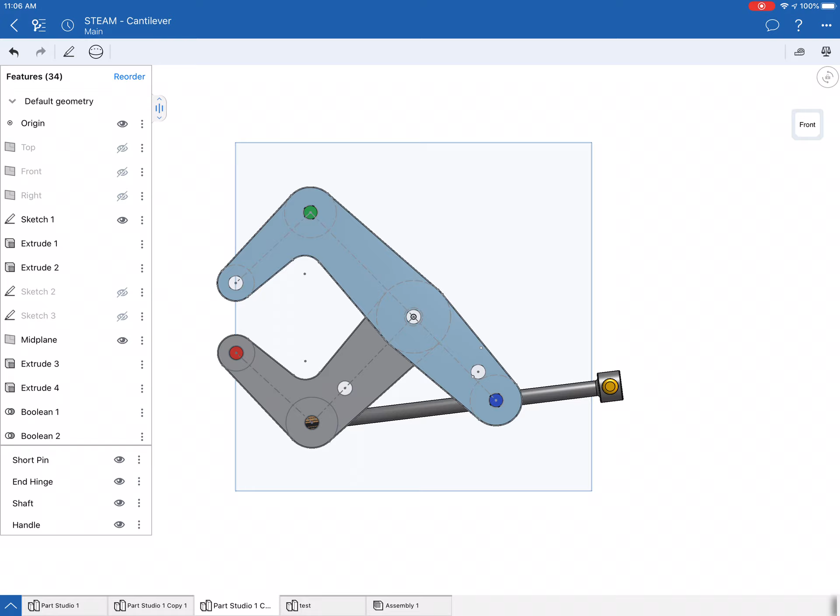Okay, we're going to finalize this drawing today for the cantilever. And as you can see, we have all the pieces already on this, but we are missing the grips. The grips are these square pieces right here, and that's what we're going to work on today.

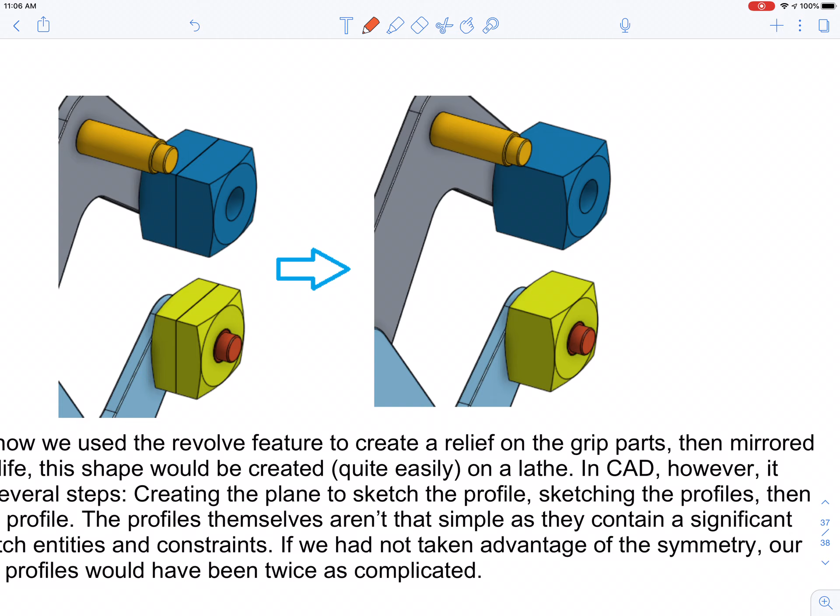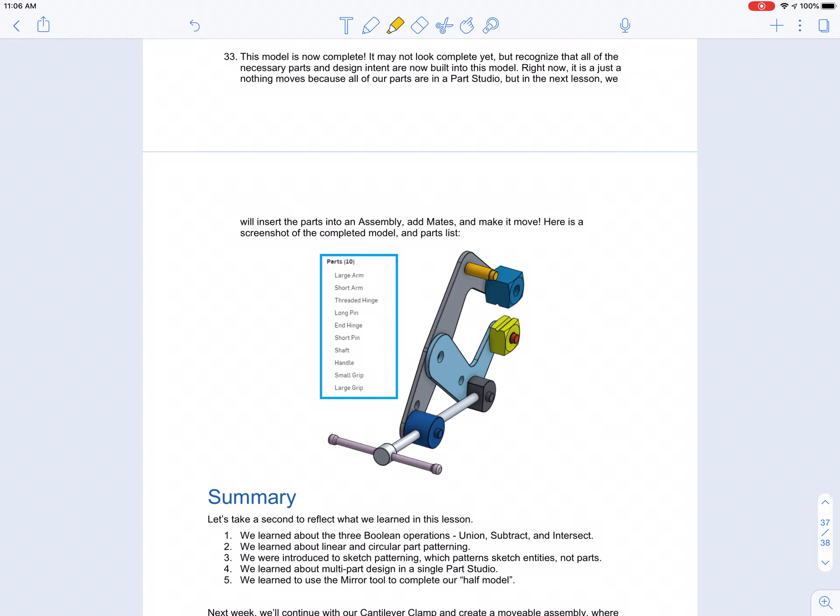So these are steps 26 through 33. Again, we're going to draw one side and then mirror it so that it becomes one whole piece, like this, okay, as we've done with the pins and the handles. And once we're done, we're ready to move on to lesson 4.

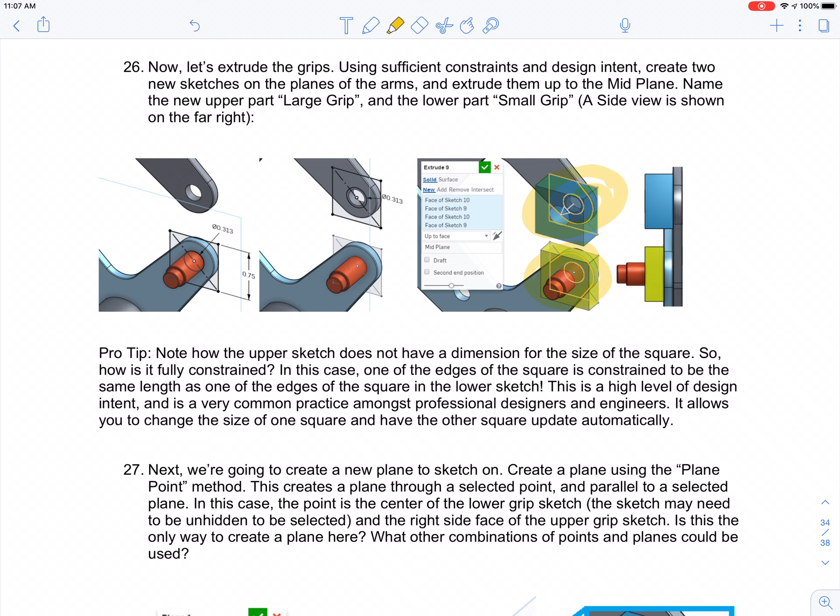Okay, so we are on step 26. Step 26 says, let's extrude the grips using sufficient constraints and the design intent to create the new sketches, planes, arms. So we have to create them on a plane that's on the face of the arms. This grip is on the face of the small arm, and this grip is on the face of the large arm. So the grip that's on the face of the large arm is your large grip, and the grip that's on the face of the small arm is the small grip. Meaning, this is small, and this one over here is large.

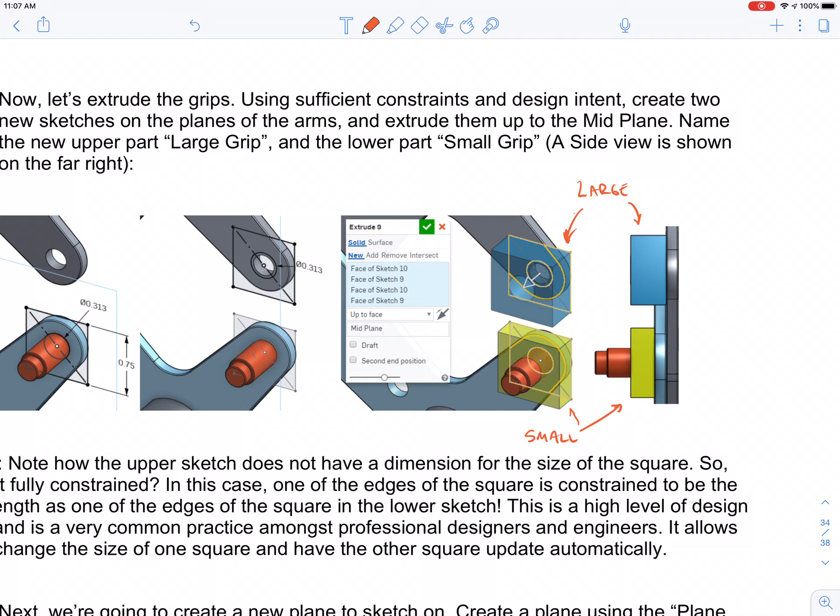All right, and our dimensions are going to be, they're going to be 2 squares, so our dimensions are going to be 0.75 for both sides of the square, and there's going to be a circle of 0.313 diameter in the middle of it. All right, let's get to it.

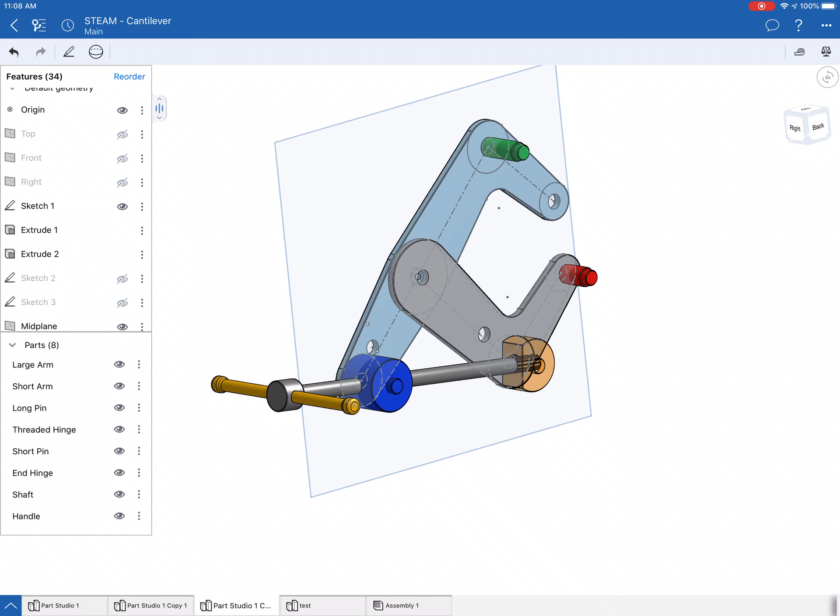All right, so I have the drawing of my cantilever here, and as you guys see, I've increased the size of my parts menu. Why? Because what I want to do is make everything that I do not need invisible.

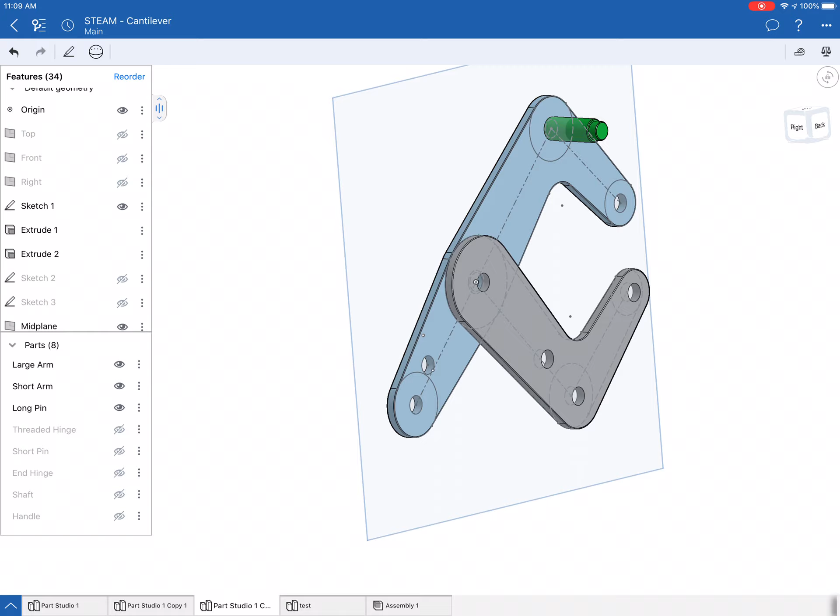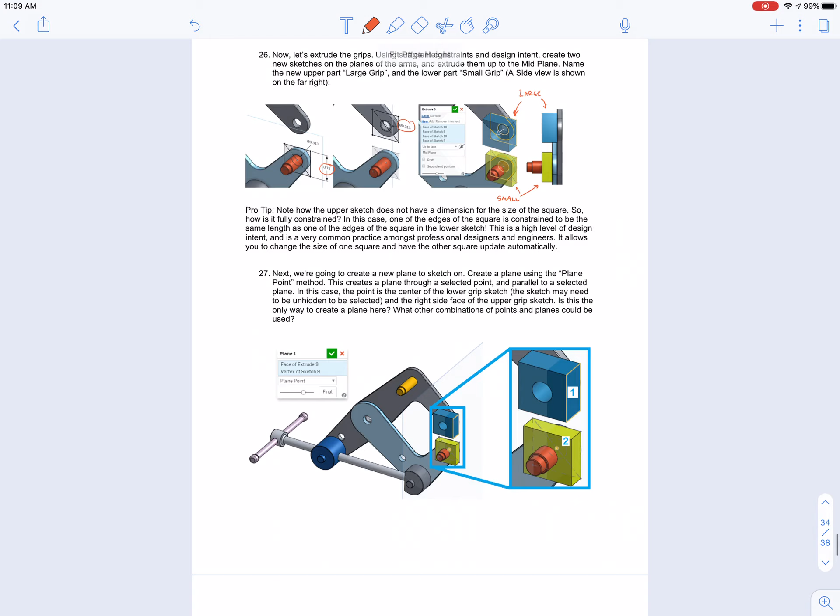So now the question is are my arms facing this way or are they facing this way? Am I seeing the front side or the back side? Well, that's easy, we can check. We're facing the back side of the arms. If you see over here, the clamp is opening to your right, so that's what we want. So I'm going to click on back.

I'm going to lock the screen, and now I'm going to draw my square. So I'm going to click on sketch. It's asking me to select the sketch plane, so I'm going to click the face of the small arm first, and I'm going to click align. Now this is on the plane of the front of the face that's facing you, of the back face of the small arm, which is facing you right now. That's a dark gray on your screen. Okay, so what I'm going to do is just draw a square on it, and it could be any dimension, it doesn't matter, because what's going to happen is you're going to set the constraints for it later. And as a matter of fact, you can draw this on the side over here.

Boom, I'm done. And how do you know it's closed? Because the shading of it is black inside, the shading of the inside of it is black. Okay, and finally, what I'm going to do is highlight all of them, set them to construction lines, and make another line diagonally across. And I'm done. Now I'm going to set my constraints.

I want these to be perpendicular to each other. So I highlighted them, then I'm going to click perpendicular. Boom. And again, I'm going to say this and this are going to be perpendicular to each other.

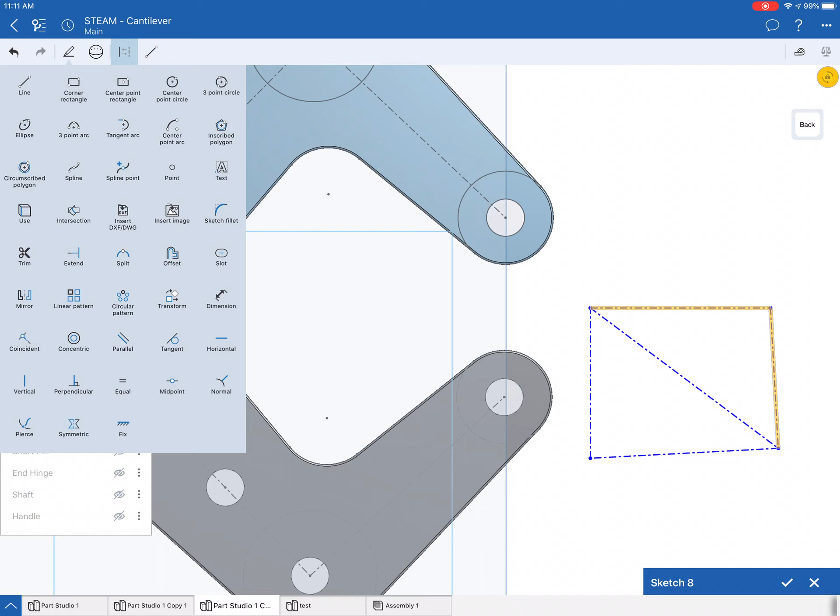Okay, I'm going to set 2 more lines perpendicular to each other. Once I set these 2 perpendicular to each other, that's all I need. Now they're all perpendicular to each other. Now all that I would need is to set my sizes.

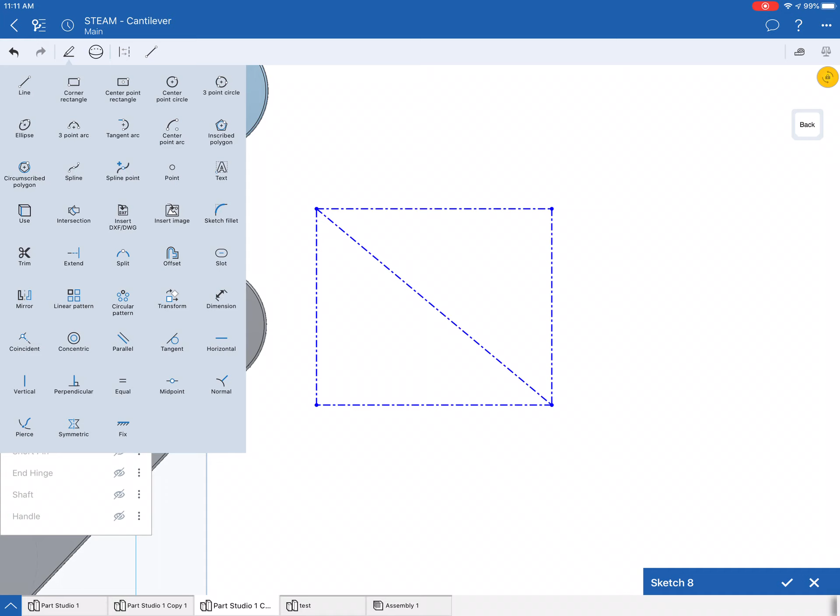I know that this is going to be 0.75. So I'm going to go into my dimensions, click on dimensions, click the side, and set that to 0.75. Done. Now for the rest of them, easy.

Oh no, I forgot to unclick. You're supposed to unclick the dimension settings. So I'm going to click that one and this one. The one on the right, the vertical line, is set to 0.75. I'm going to click on my menu, click equal. Boom, they're both set to equal.

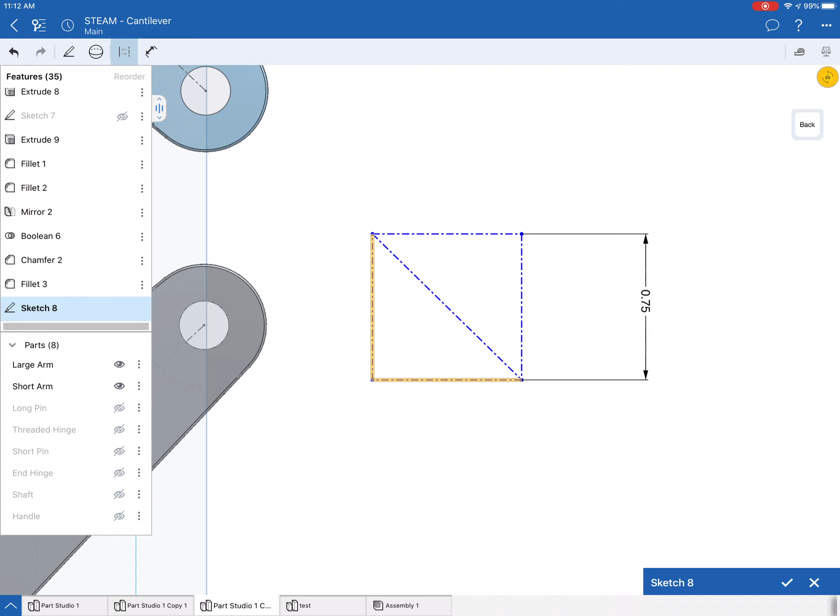Now, because these 2 lines that I'm highlighting are also perpendicular to those 2, and they're perpendicular to each other, I would not have to set their length equal to the other 2, because by definition they will be equal to 0.75 since they're perpendicular to each other and both perpendicular to 2 lines of that length. So that would just be over constraining them. I don't want to do that, I don't need to do that. I can do it if I want to, but it's not going to affect my drawing unless I ask it to do something it can't do, acting against something I've already asked it to do.

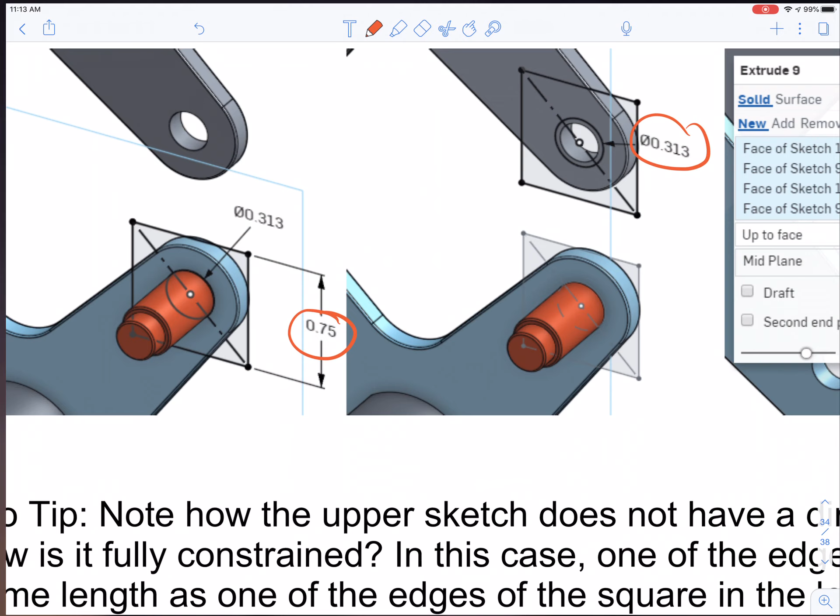Next thing I'm going to do is draw my circle. Center point circle. Now I'm going to click anywhere near the center, and it should click to the center of the circle. Now I don't think that's a construction line. Actually, the outside lines of the square are not construction lines, only the center line.

So I'm going to change all those lines again. I'm going to click that, unclick the circle, and click construction lines. So I'm going to click on the circle and all the lines that I want to change back to regular lines. Boom, and there we go.

Now what I want to do is set the size of my circle. So I'm going to click dimensions, click that, and that is going to be 0.313. Boom, I'm set.

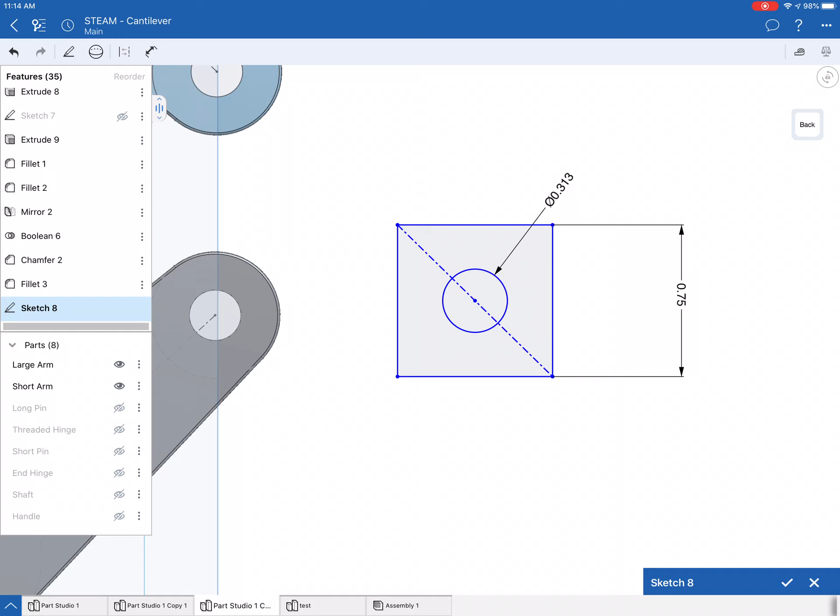Now, because the circle is constrained to the center of that diagonal line, if I move that circle, the whole box is going to move. What does that mean? I'm going to click this circle and this circle right here, then open my sketch menu and set concentric. Boom, immediately everything moves to that spot.

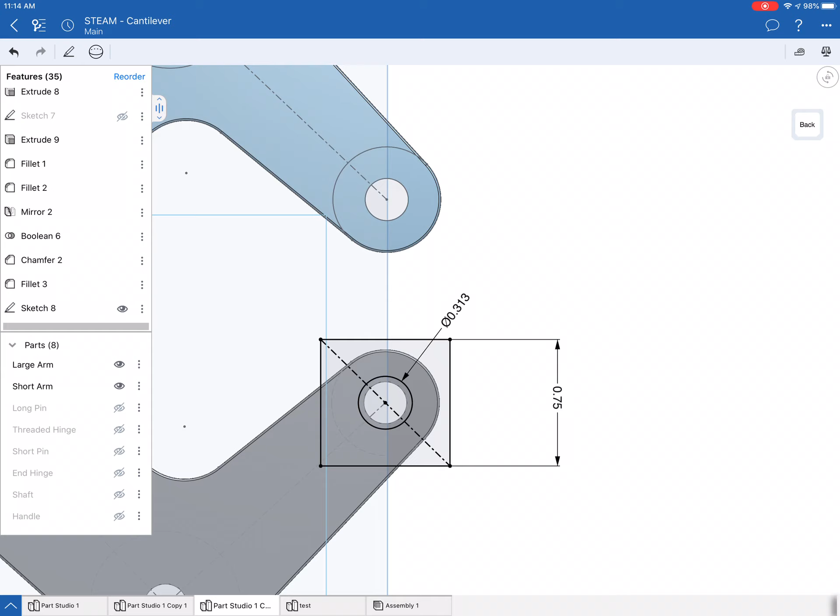Again, I'm going to do the same exact thing for my other line. Okay, I'm done with that sketch. Boom, done. Now I'm going to go over here and click on the sketch menu again.

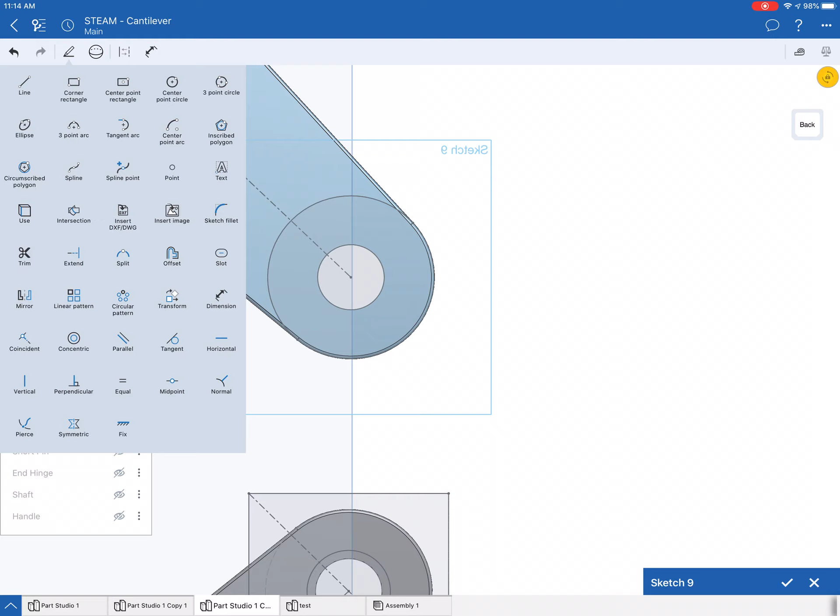This time I'm going to click on the face of the large arm, which is that light gray, blue-green-gray that I have there. All right, that's my sketch. I want to lock my screen so you don't shift it, and I'm going to click line.

Again, I'm going to draw a square. Boom, square done. All right, now I'm going to set my lines perpendicular. Oh, and I want to draw a diagonal line here. Boom, okay, now I'm done. All right, now I want to set these 2 perpendicular to each other.

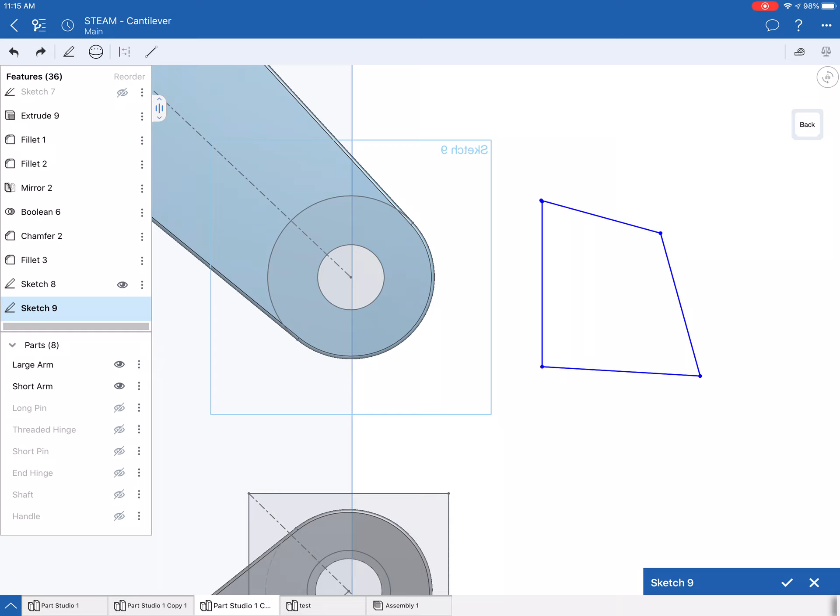I'm going to click here, perpendicular, and okay, that's weird, let's see what went wrong. Oh yeah, those lines are not joined together. I'm going to do that line again. Click here, click here. Okay, now they're joined.

Good, all right, so now I'm going to make my diagonal line. Okay, now we're going to set my lines perpendicular to each other. Highlight that line, highlight that line. Sketch menu, perpendicular, boom.

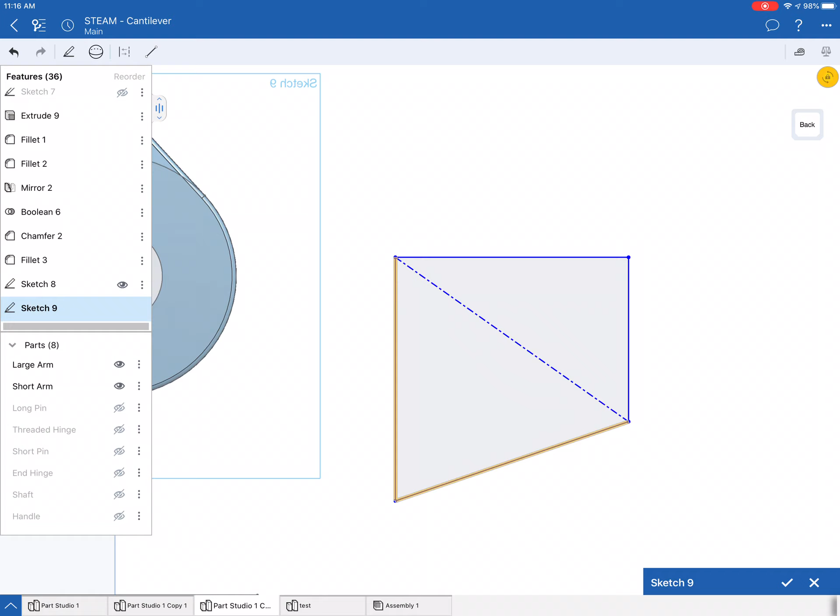Okay, now I'm going to set this line and this line perpendicular to each other. Perpendicular, boom. And now I'm going to set this line and this line. Now, I don't have to set this line and this line perpendicular to each other because they're going to be perpendicular just because that's the way quadrilaterals work. If you've taken geometry, you should be aware of why that works.

And now, if they're all perpendicular to each other, I have a quadrilateral. What I have to make sure is that, again, they're of the right dimension.

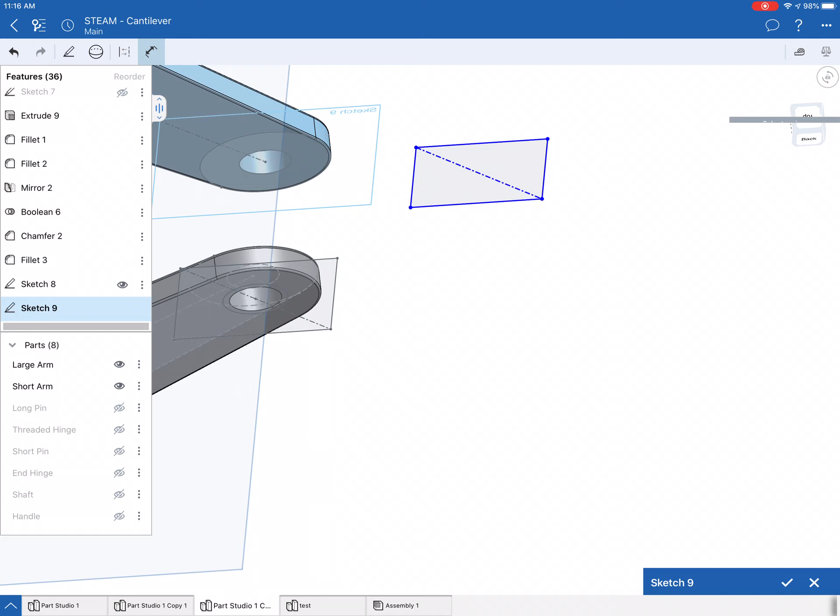So I'm going to set— actually, I don't have to set dimensions. I can just set them equal to the square that we already have there. So I'm going to highlight this line and this line, and click equal. Boom.

So now I'm going to set this one and this one equal to each other. Boom, and now we have a square. I don't have to do anything for this line because we've already set them perpendicular to those two other lines, which means that they have to be.

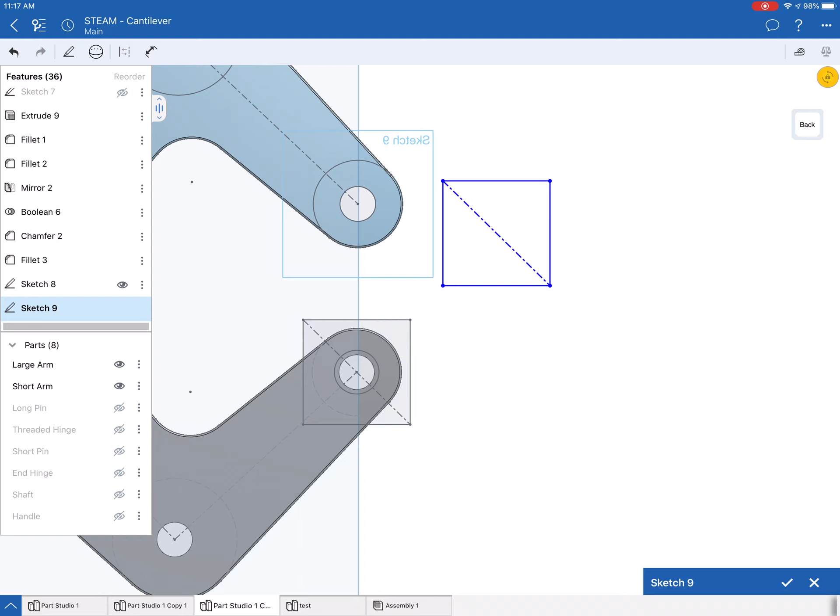Okay, so now I'm going to draw a circle. Again, all I have to do is click somewhere near the middle of the square, of that line. The midpoint of that line is going to be right at the center of the square.

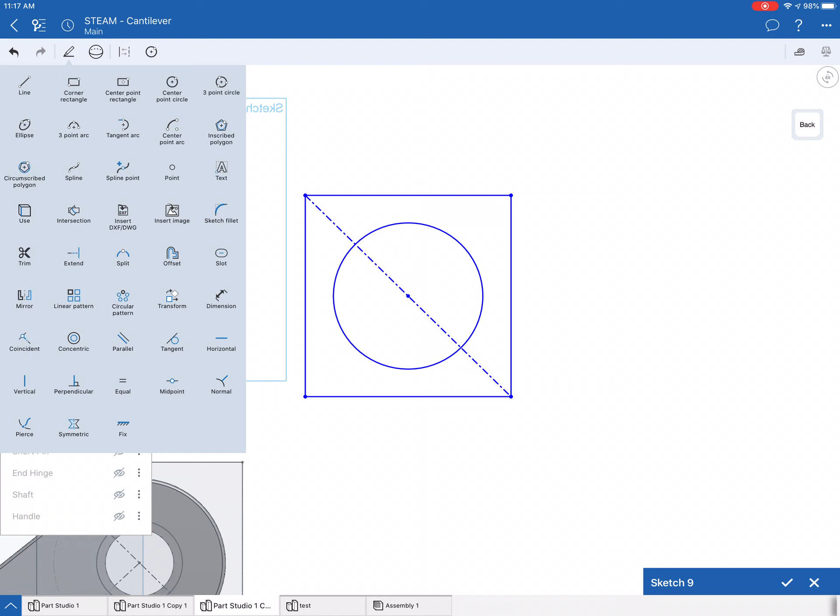So I unclick circle and click dimension. I can click dimension, or even better yet, easier, click the circle, click that circle, and set them equal to each other. Boom, done.

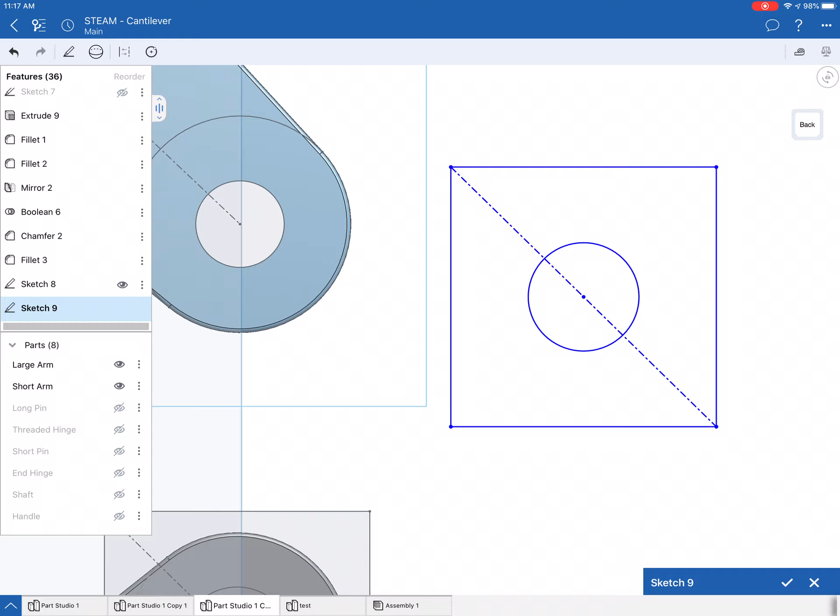Okay, now I want to make sure both circles, this new drawing is inside of the other one. Now there's something weird about this. It's not shaded gray. So I need to make sure that it is shaded gray.

Let's see, I'm going to set this line. What's happening here? Oh, I see what's happening. It's just, I'm going to click OK and edit my sketch. Okay, now it's gray, that's why I wasn't. Sometimes things like that happen. Just OK the sketch and then reopen it, re-edit it, and you'll see that things should be the way that you want them to be, especially in a simple exercise like this.

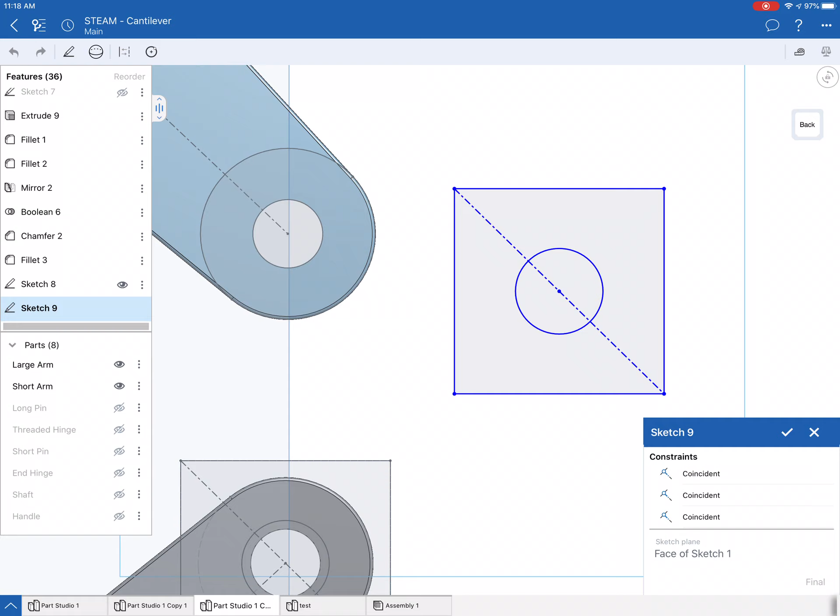Now what I'm going to do is click on my circle, the outside of the circle, and the outside of the circle here. I'm going to open my menu and click concentric, and now we have two circles right on top of each other, and the block is exactly where I want it to be. You notice that all my lines turn black because they're perfectly constrained.

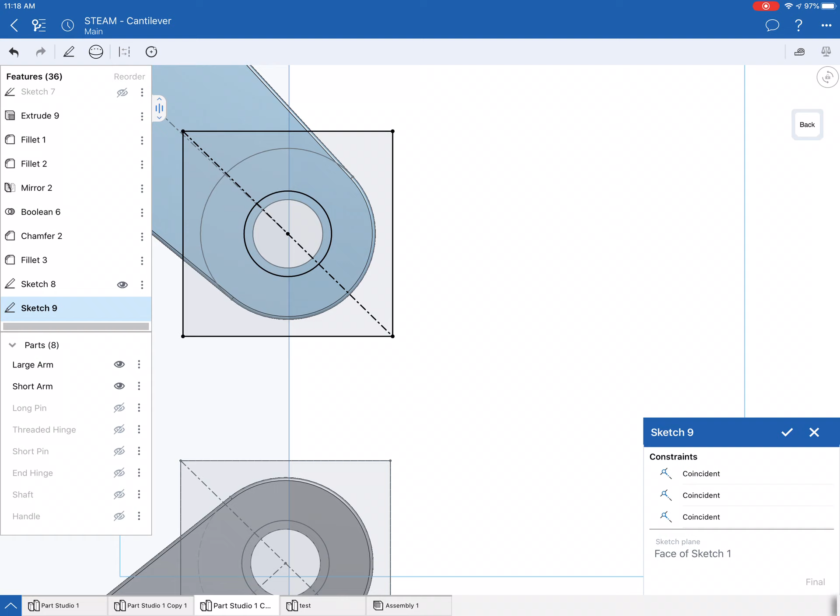Let's move on, let's see where we go next. So all of this is set. Now we're going to have to extrude the grips. We're going to have two grips, we're going to extrude them up to the midplane, and we have to change their names from large grip to small grip.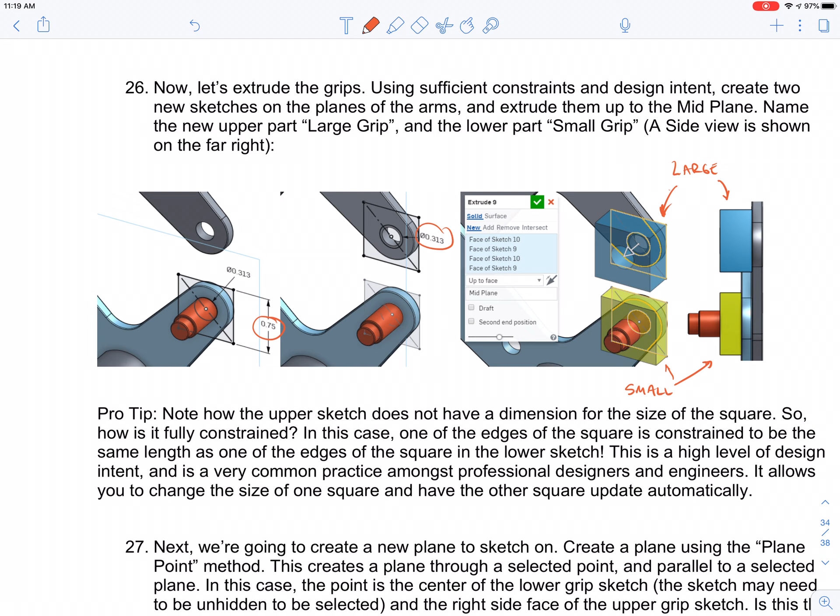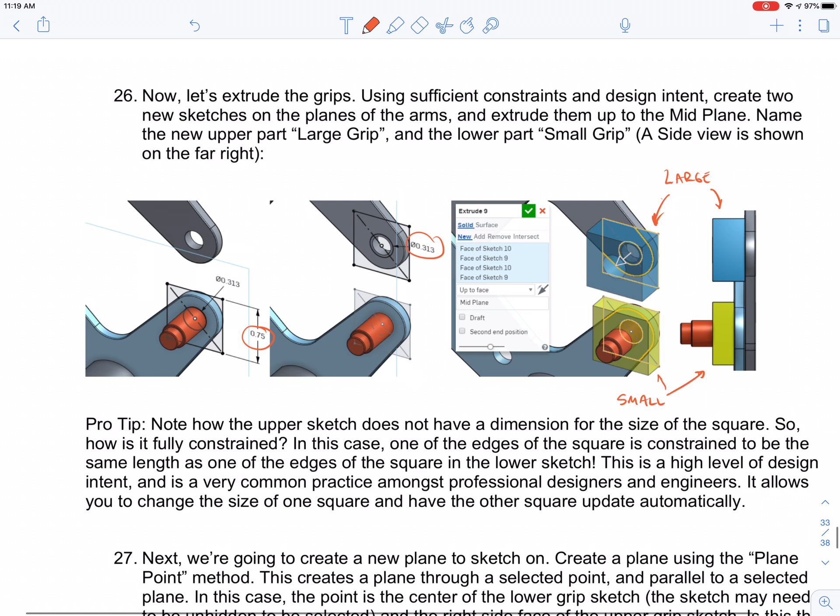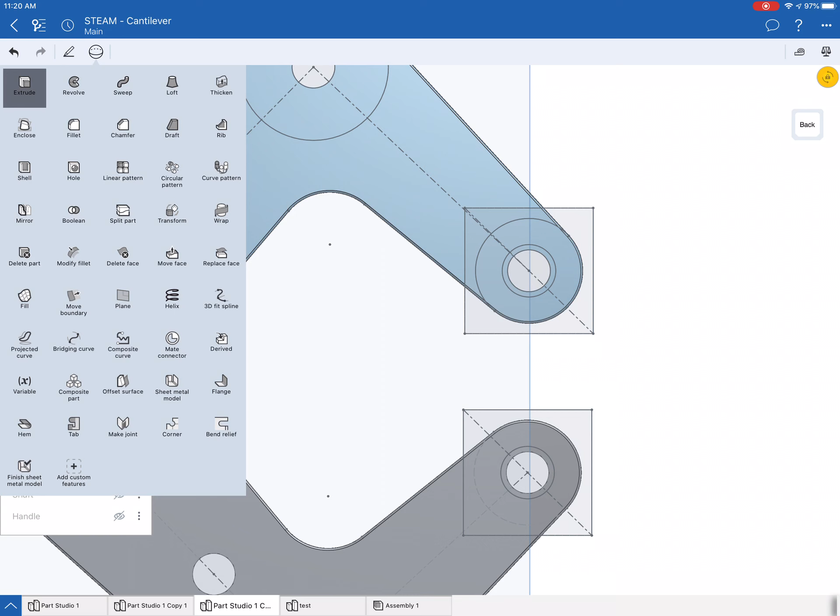Okay, so let's do that, that should be fairly easy too. Wait, let's see something, it says create. Yeah, create two new sketches. Okay, so I'm going to click my object menu over here, which is my sphere on my iPad. Extrude. And I'm going to make sure that this one says new.

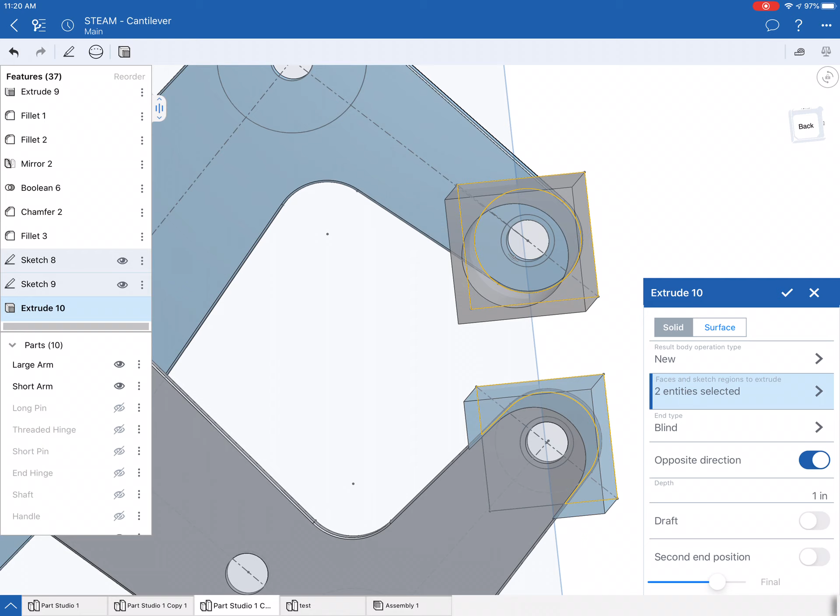I'm not adding it, first option solid. I'm going to click there, and I'm going to click there. And at the moment they're going the wrong direction, so I'm going to click opposite direction. And I have to make sure that I've clicked on the right options, right? Because as you can see, that's not what I want to extrude, I want to extrude the whole block. So what I'm going to do is click that.

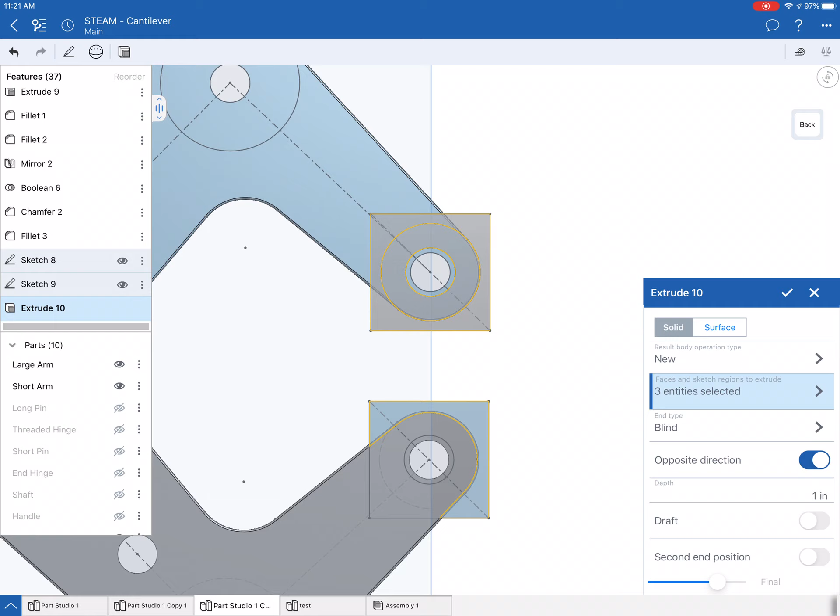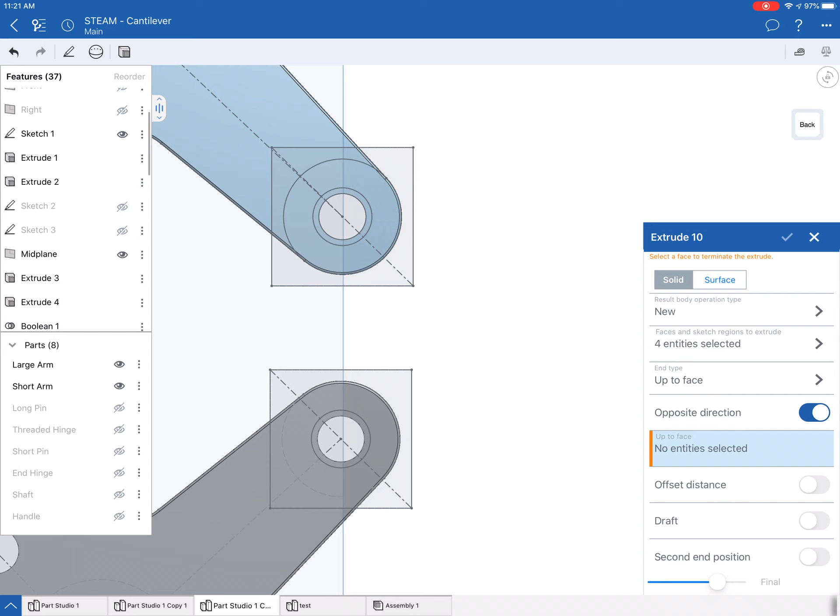Okay, I'm going to lock my screen. Alright, so now what I have to do is click here, end type up to face. And what I'm going to click on is here on the top left menu, as you see me scrolling down, I'm going to look for midplane. I'm going to highlight that. Boom, right? So now you see both of my squares are done.

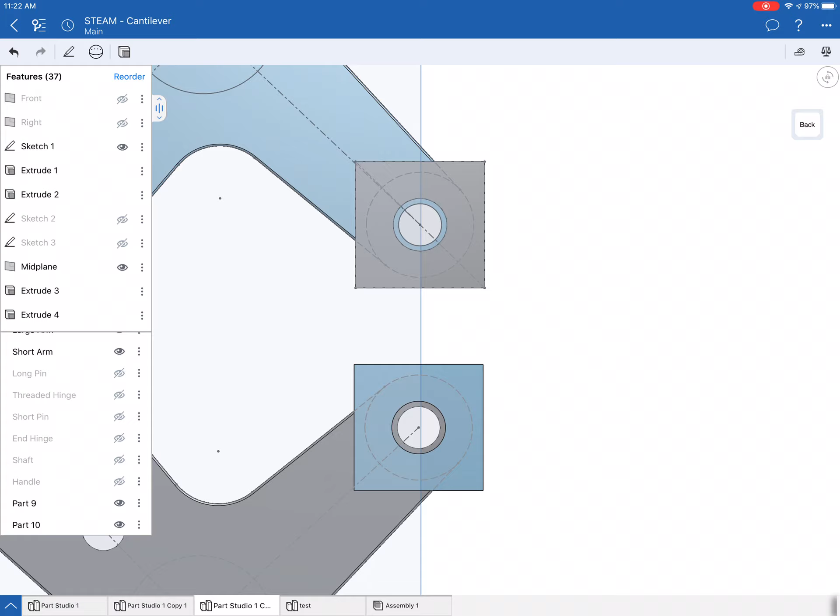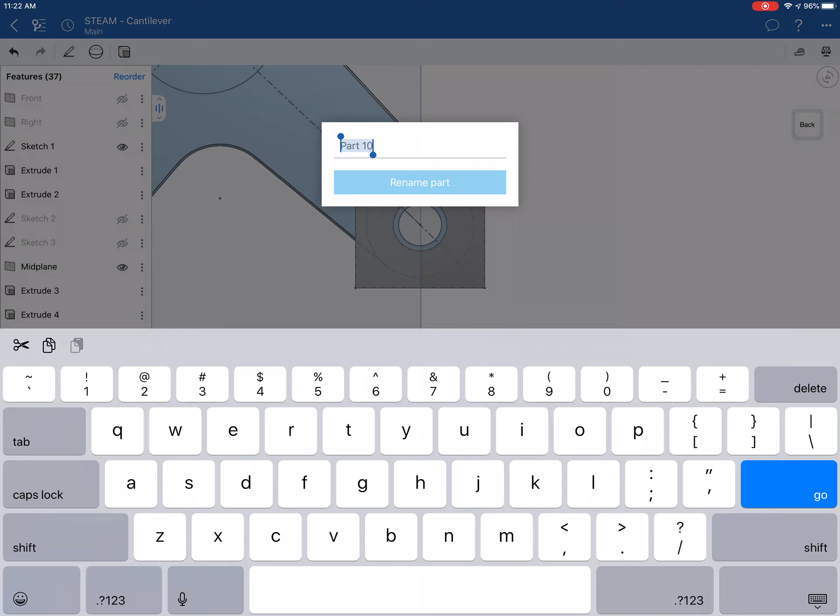And what I'm going to do to have them show up a little better is change their colors and their names. Now, as you see, this one over here, that's my short grip, my small grip, right? Small grip, small grip, so I'm going to change the name. Small grip. And this one over here is going to be my large grip. Large grip, yes. Large grip.

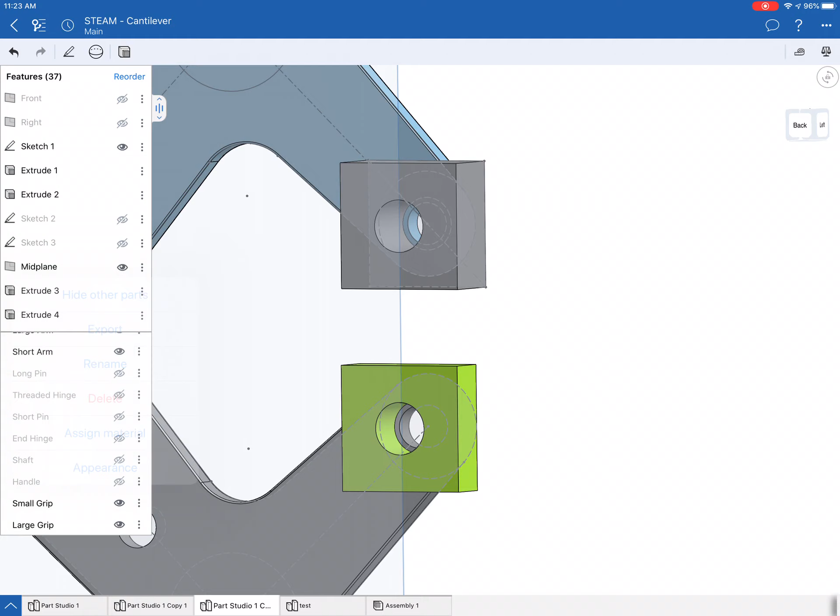Okay, so I'm going to change the color of my small grip. Let's do appearance, and I want to make it sort of like what they have on the instructions here. Yeah, that's the color I want, something greenish, yellow, that's it, boom. And for that one, oh, they have a weird color, but we'll do something else. For the large grip, we'll do, I don't know, orange red. There we go, boom.

Okay, so I'm done with those. All right, I've named my grips and I've changed their colors.

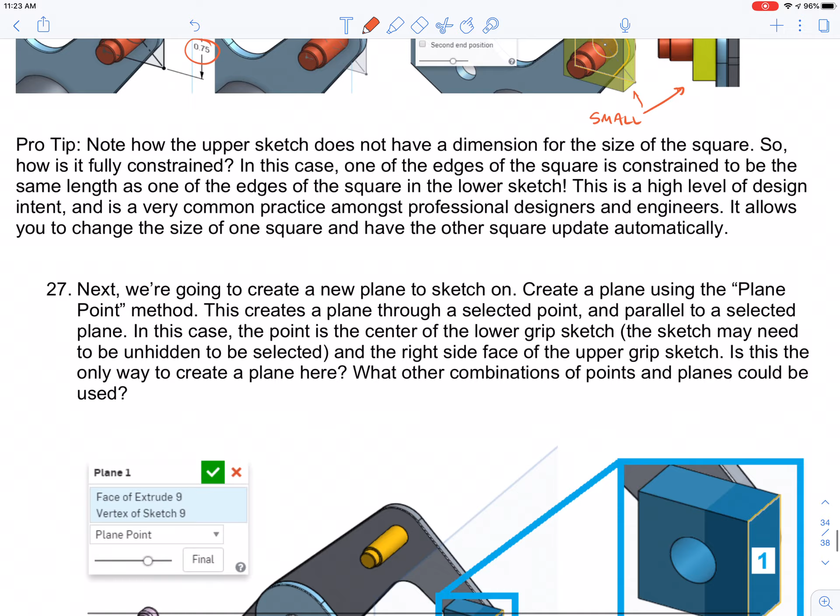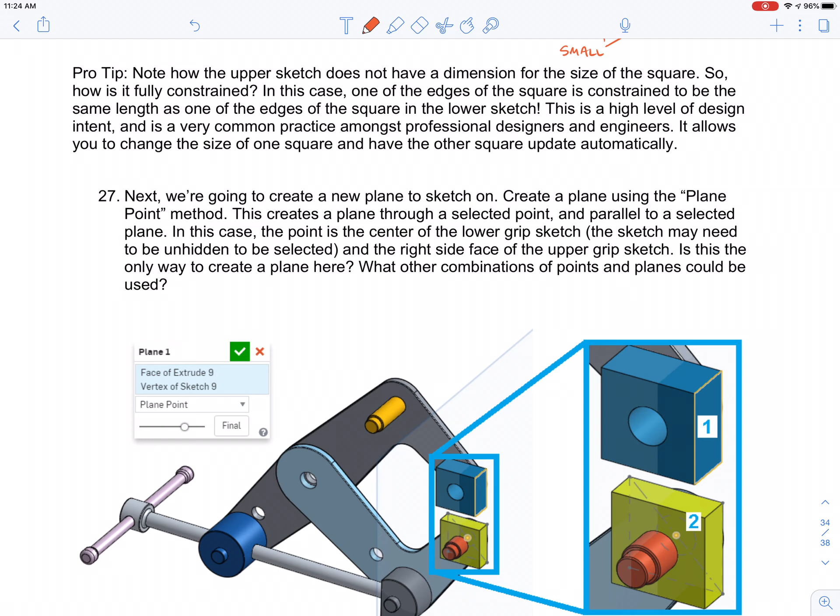Now what it says is we're going to create a new plane to sketch on, using the plane point method. I'm going to click on the object menu, click on my plane function, and then the option is going to be plane point. It says create a plane through a selected point and parallel. We did this way in the beginning, if you don't remember.

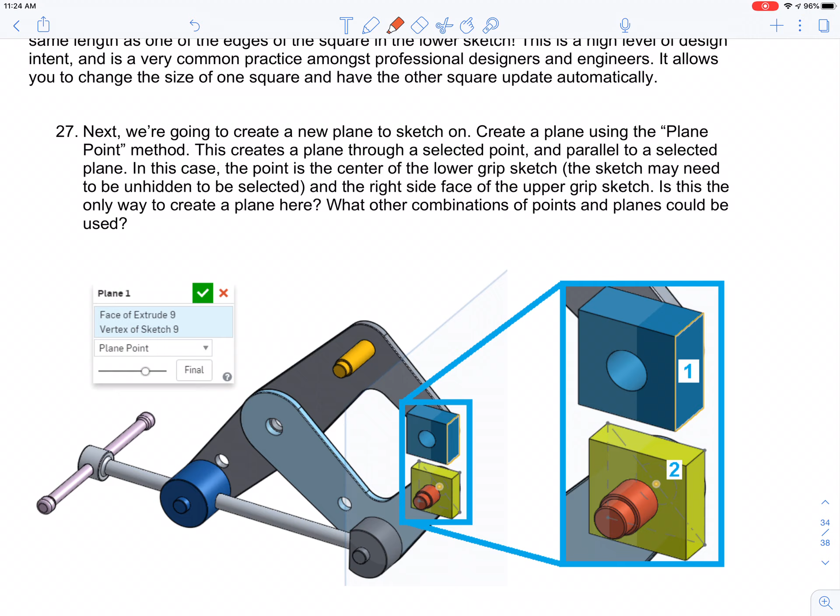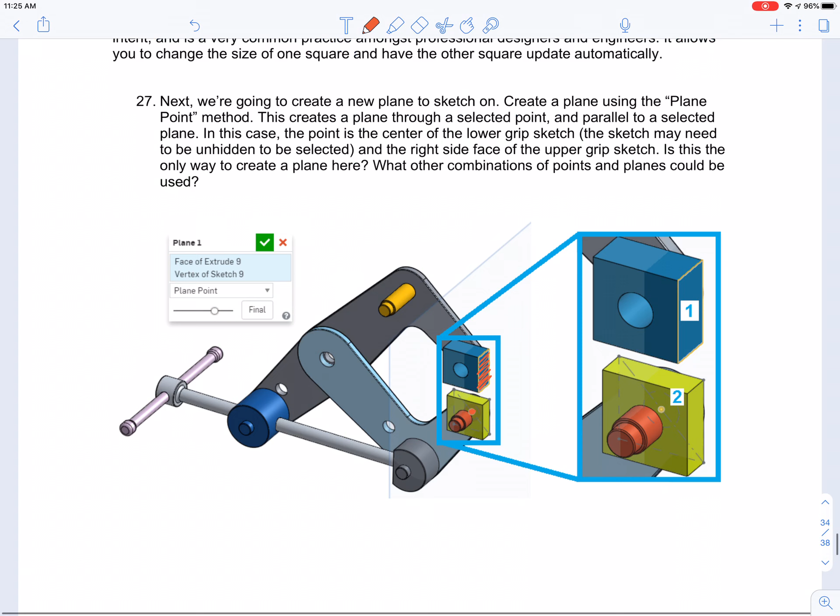What we want to do is select the center of the lower grip sketch and the right side face of the upper grip sketch. So basically the first square that we drew, in the center of that circle, we're going to click that as my point, and then we're going to click this face as the other option. So again, this would be the point that we're picking, and this is the face that we're picking.

Let's do it. Alright, so I'm going to go and click on, I'm going to hide my arms and sketch 2. Oh, I want to show my last sketches.

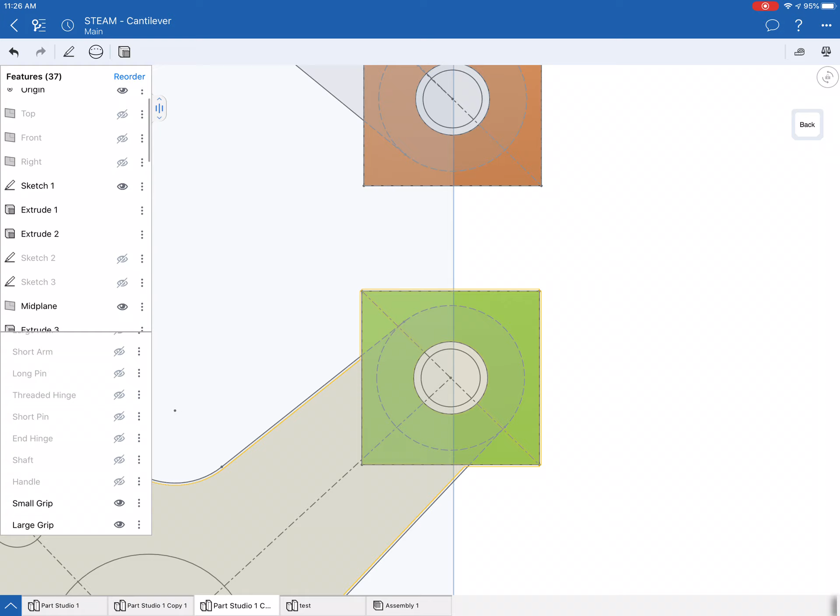Wait, what are my last sketches? Oh, I see, I think I know. Okay, that's my sketch, these are my 2 sketches that I drew. And what I'm going to do is hide my first sketches. Sketch 1, boom, my arms are gone, which is fine because I just want the sketches for my squares.

Okay, so now what I'm going to do is click the object menu and click on plane. You see that one right there? Boom, click on that. Now plane type, which is below the highlighted option, I'm going to click plane point. Okay, which if you remember, this is what they're asking us, plane point. Alright, plane point.

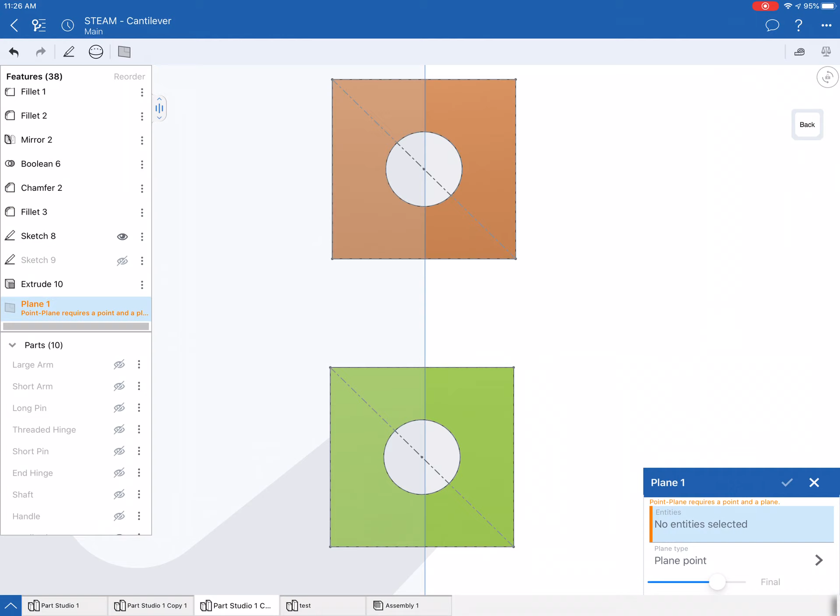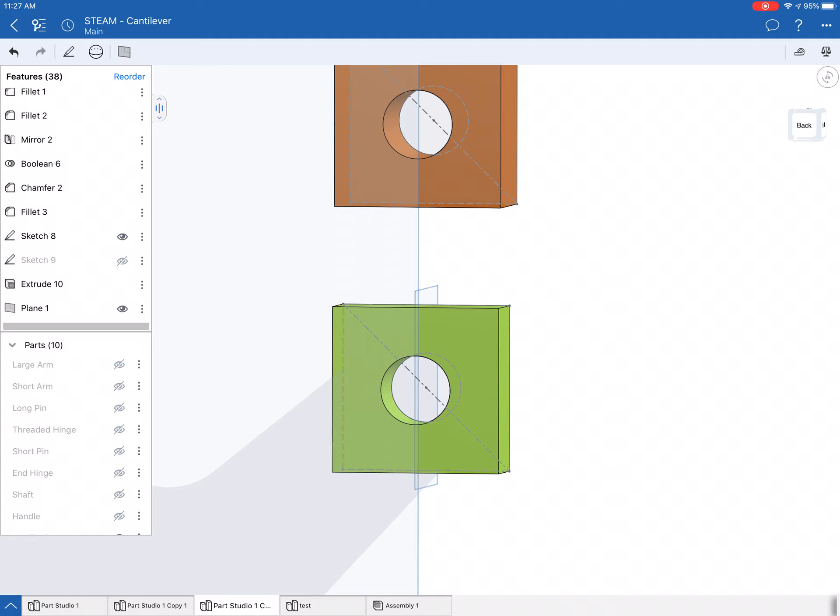Now plane point, we have to click on our entities. I'm going to click first on the center of the circle, and next on the face of this. Done. Alright, so we did it, and we are set. You see we got a plane right through the center of that, and that plane goes through the center of the other one too because they're lined up. Alrighty, let's keep going.

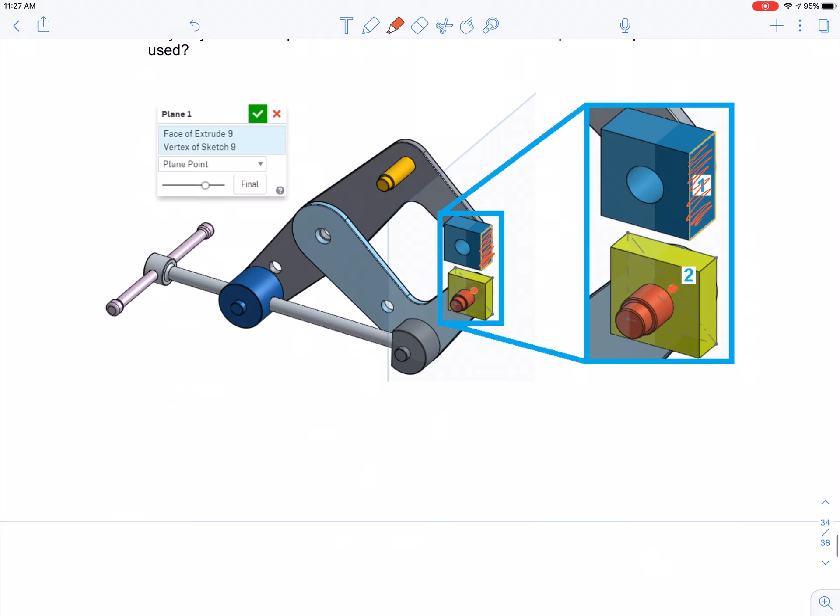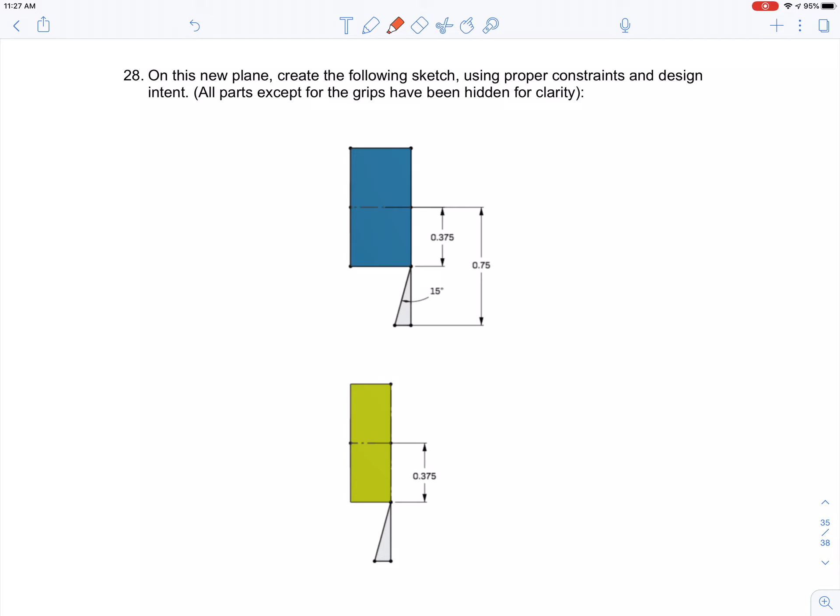Okay, now on this new plane, create the following sketch using proper constraints and design intent. All the parts except for the grips have been hidden for clarity. So, same thing I did, I hid all my other parts. Now you can only see those 2. Essentially what I'm going to do is create a line through the center of these 2, a construction line.

And I'm going to set this dimension to make sure that my line is set at the right point. Then I'm going to offset that line by this distance, and I'm going to have another line here. Same thing I'm going to do over here.

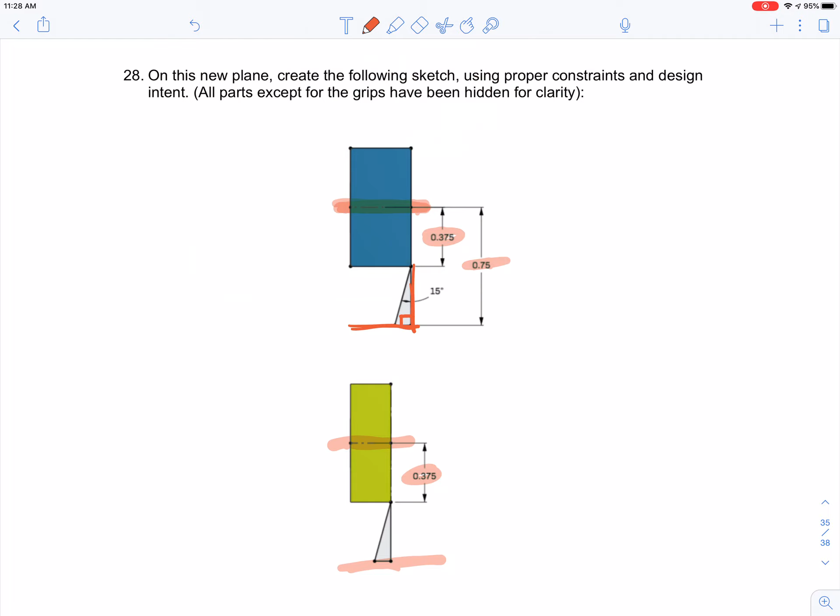And then from there, what I will do is draw a vertical line here so that these 2 lines are perpendicular to each other - this line over here and this line. After I do that, I will draw another line, and this line is going to go from here to any point, it doesn't matter.

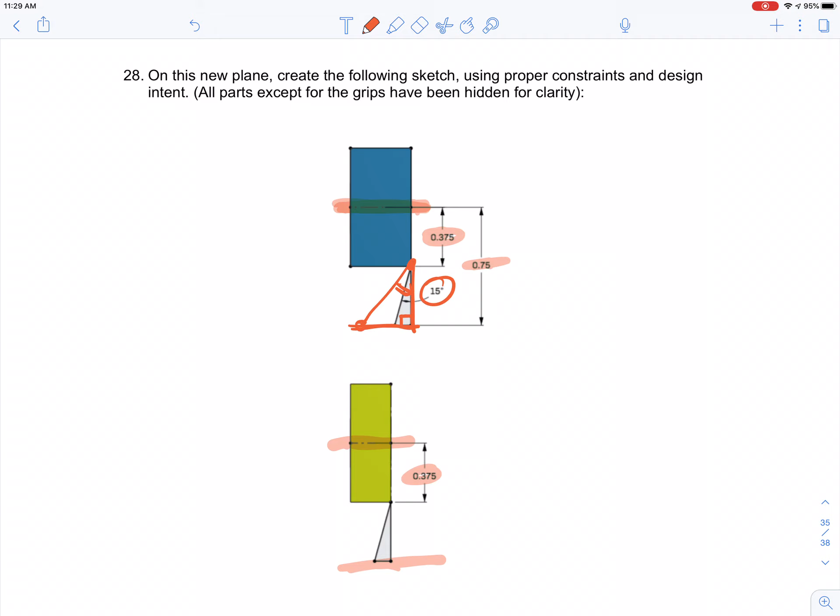What I will do after I draw that line is set the angle to be 15 degrees. One of the things you have to be aware of is that when you draw that little triangle, you're going to first have these 2 lines sitting perpendicular to each other. Once you draw that other line over here, this whole thing needs to turn gray - that you need to do for sure. Then we're going to set our angles.

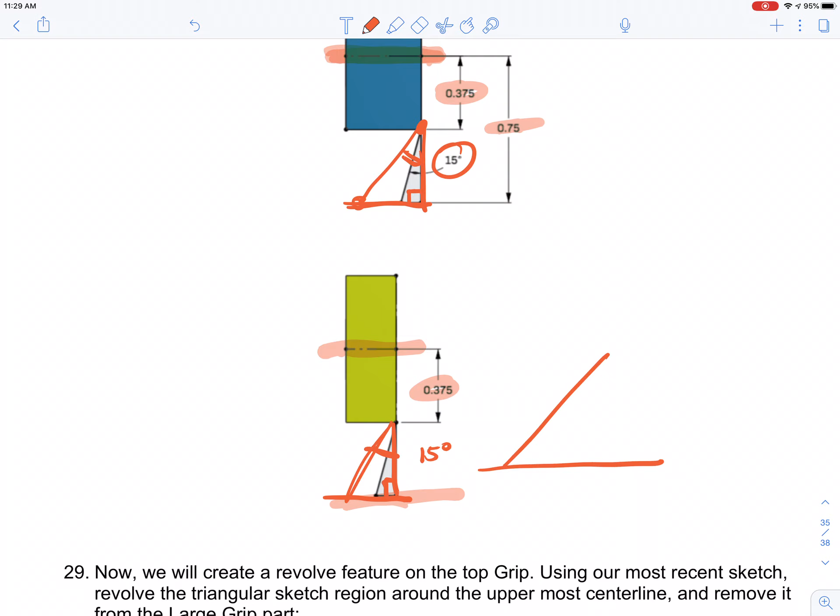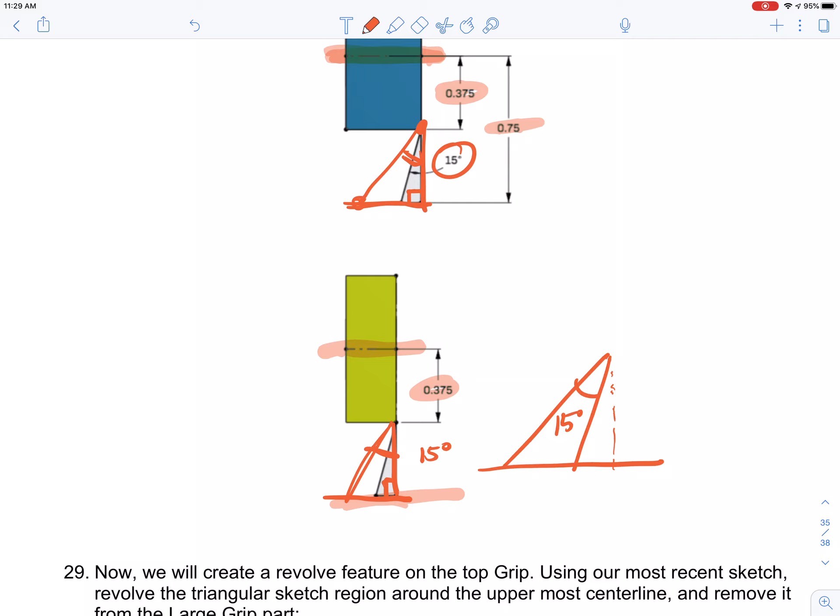If you don't set the first 2 lines to be perpendicular to each other, then what's going to happen is when you make this angle 15 degrees, your line like that, and this line over here that you had vertical, is going to move. This will be 15 degrees, but your line won't be the line that you wanted, which was supposed to be a straight line. So you have to be careful with that. Let's do it.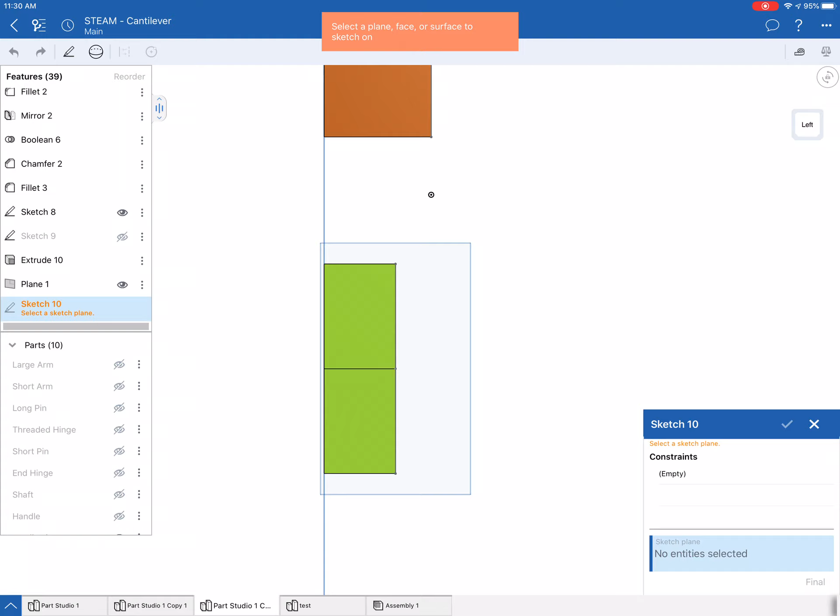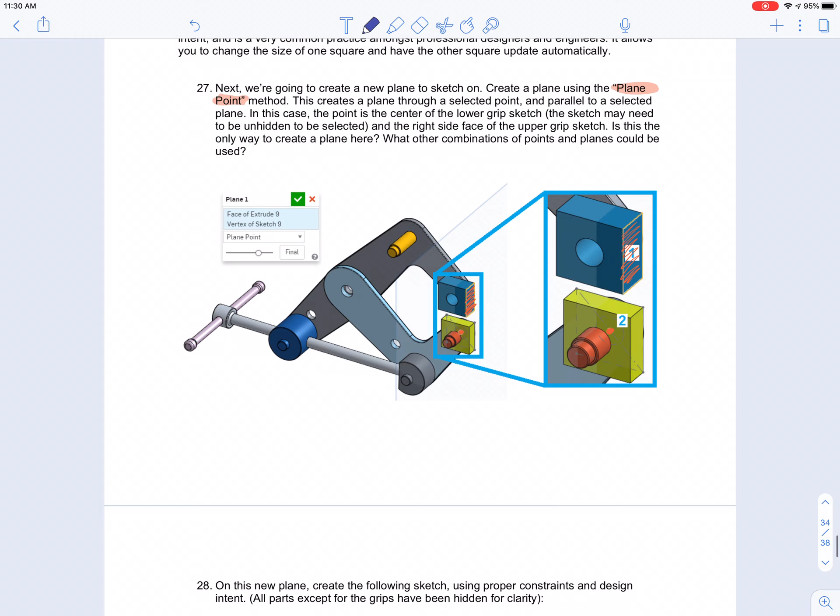All right, so now I'm going to go to my left view, and I'm going to click on Sketch, and click on that plane that I created. Did it ask me to name it? No, it doesn't tell me to name it anything, so I'm just going to leave it as plane 1.

Now what we're going to do is draw those lines. I'm going to draw my line. What I like to do is just draw a line, and attach it to where I want to attach it.

Now I'm going to connect this to this line over here, and I'm going to click midpoint. I'm going to find the midpoint over here, and that's it over here. Boom, done. Then I'll click this line over here, click this line over here, and again click midpoint. Boom, now we're done.

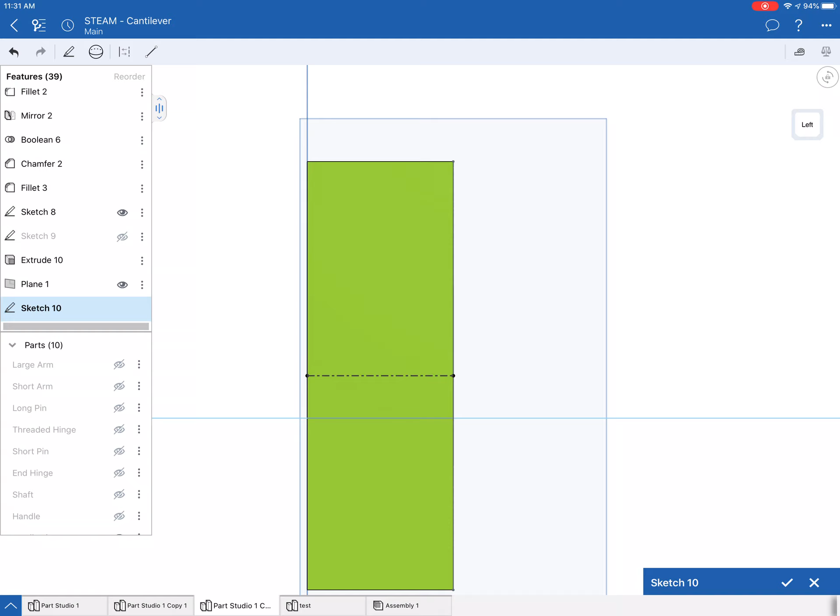And if I click dimensions, I can click here and click here, and that should be 0.375. Very good.

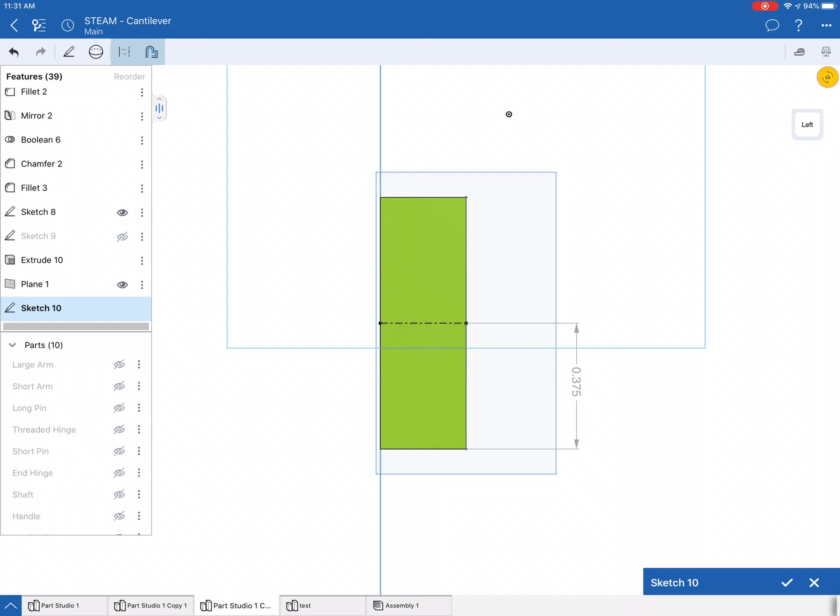Now what I'm going to do is offset this line. I'm going to click here, click offset, and I need to click my line to offset first. I'm going to make sure the offset is set correctly. I'm clicking on the number but nothing's happening. Okay, here we go. The offset has to be 0.75. So I'm going to click on 0.75. Boom, line's offset. Good.

So I'm going to leave that here. Okay. And we are set. Boom.

Now what I want to do is make this line into a solid line. Okay, solid line, boom, done. Uh-oh, wait, what happened? Oh, I see, I didn't shift it, I just moved the drawing.

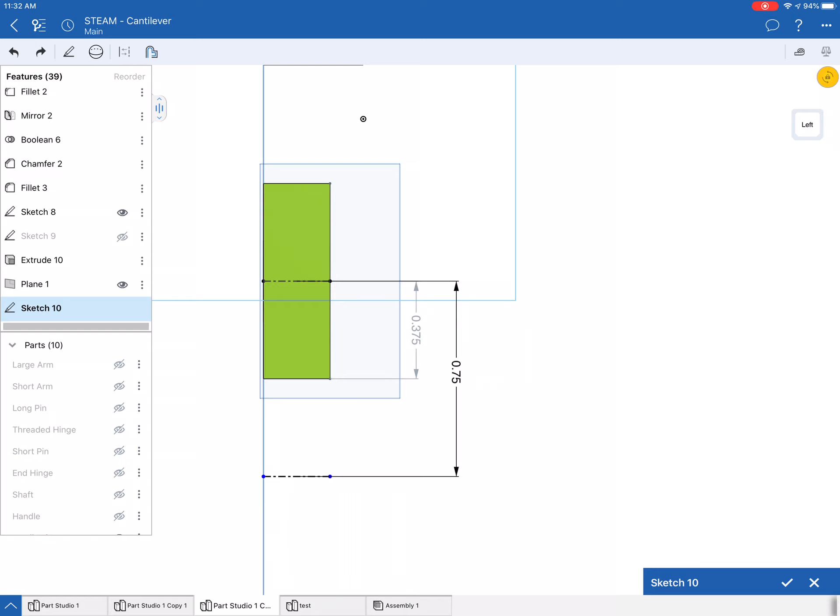Okay, so now again I'm going to click my line. I'm going to click, okay, so now my line won't move.

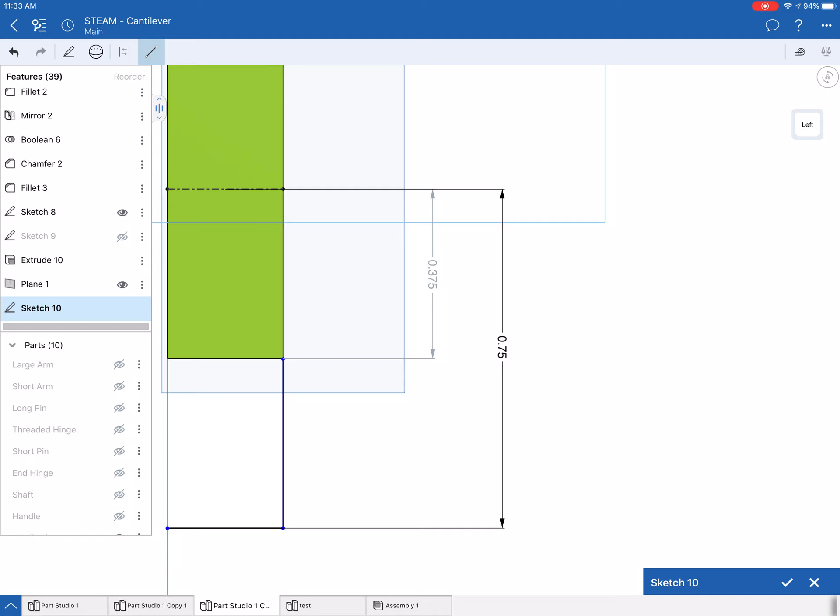All right, now what I'm going to do is draw a line from here, from this corner right here, which is obviously not clicking. From here to here, boom. Oh, I forgot to unclick line.

All right, you notice there's a gap there, right? So I'm going to click on that point over there, and click on this point over here, and say coincident. Boom, now the line is joined. The line turns black. Okay.

Now I'm going to click on this line and this line, and say perpendicular. Boom, so now we have a perpendicular constraint to those two lines, this one and this one. Again, if you do it again, it doesn't matter, it's just going to stay what it needs to stay.

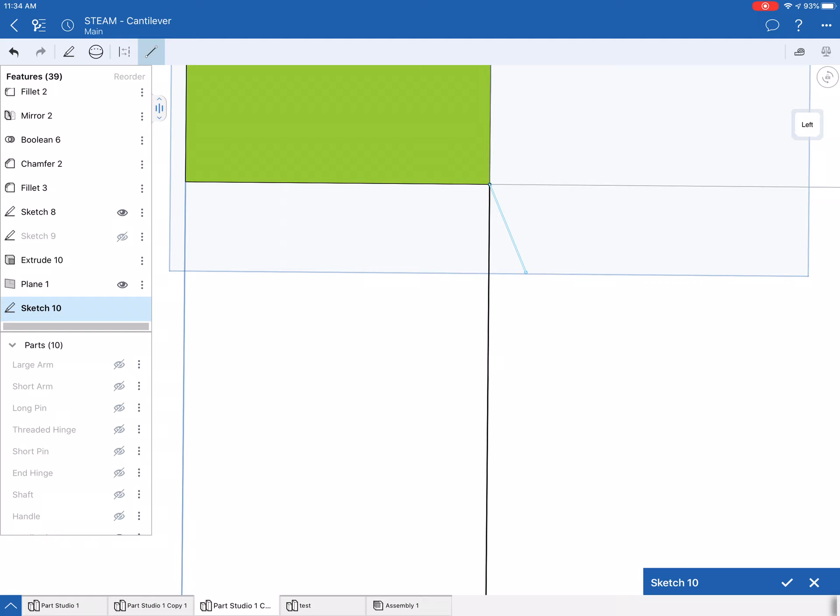Again, now I'm going to draw a line from that point, and the problem is that whenever you move the screen and make it big or small, it does things like that. I'm going to lock the screen again. All right, again, line—click on that point and just click any point on that line. I'd suggest not clicking on the midpoint because it makes things very difficult. Okay, again I forgot to click line, so that's why I drew another line.

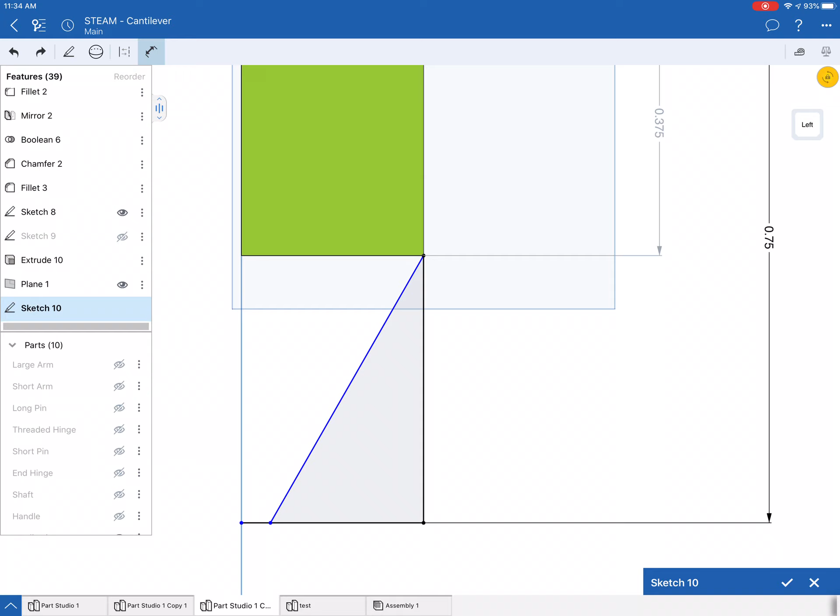But you notice the inside of my triangle is gray, which is what I want. Now what I'm going to do is click on dimensions, and click both of those lines, and you're going to see 29 degrees. I don't want 29, I want 15.

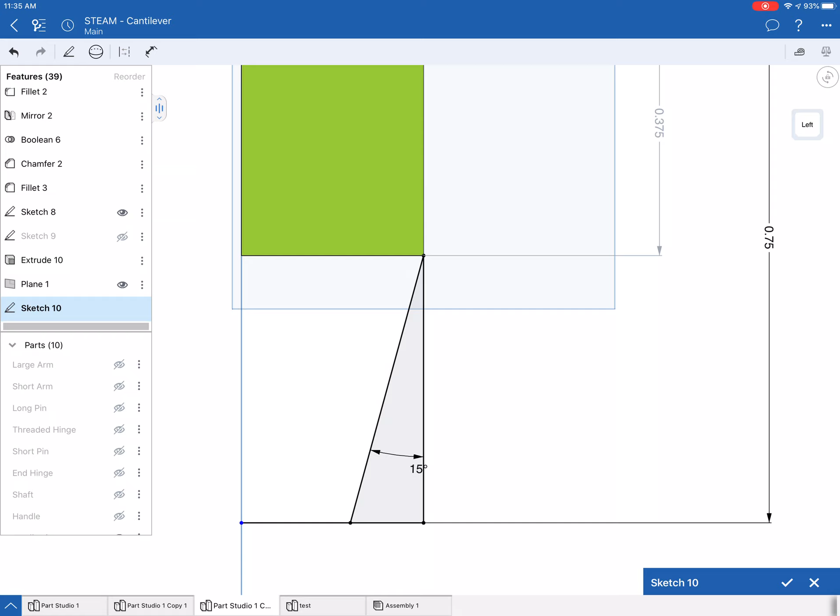Now, because I made this line and this line perpendicular to each other, the line that's going to move is the angled line as opposed to the line that's vertical. Otherwise you'll have a problem, trust me.

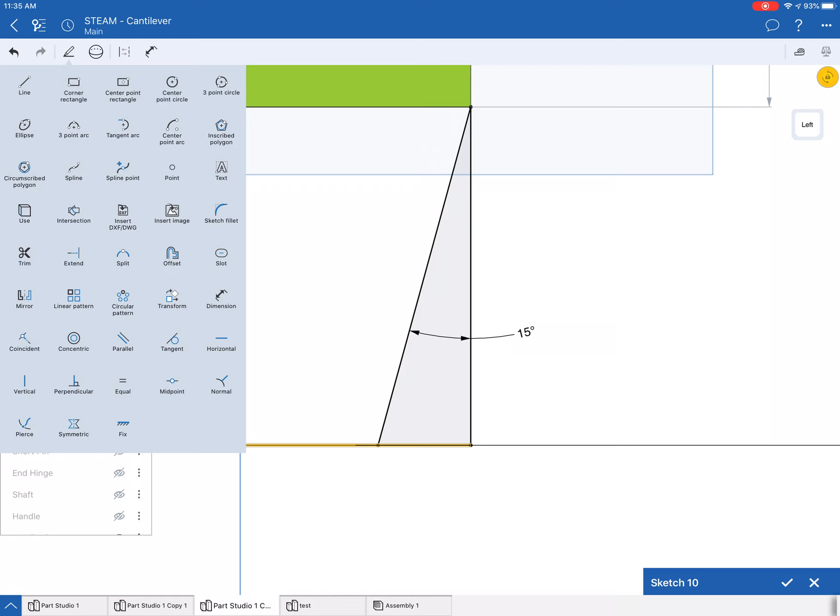Okay, we want to remove this excess piece of line right here, so I'm just going to click on trim, which is somewhere over here. Where is it, where is it? Trim, trim, scissors. There we go, boom, and I'm done.

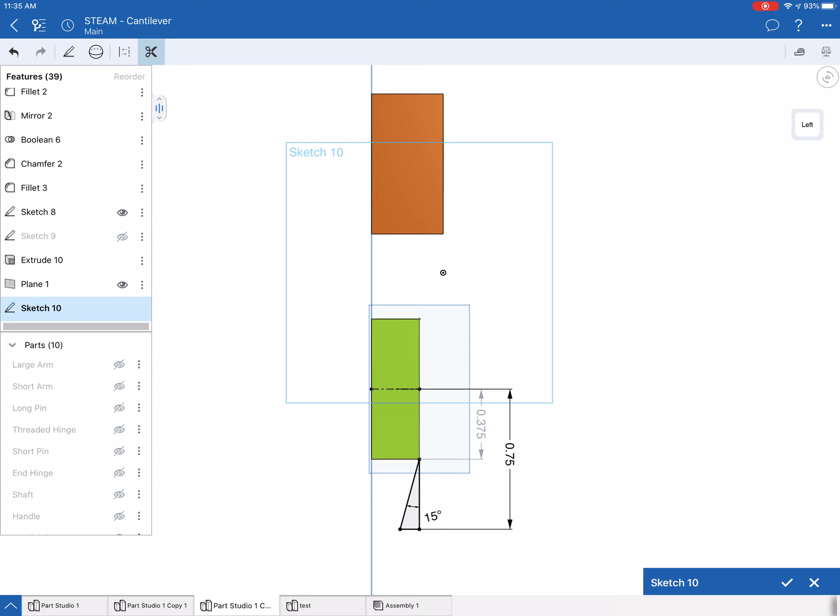And I'm going to repeat the same process for this over here, and they're done on the same plane, so it shouldn't be a problem. In the next video, I'll tell you what to do once you're done with those drawings.